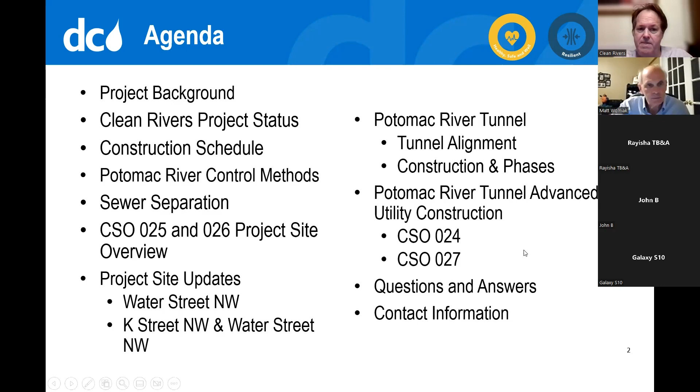All right, so a little bit about the background. The project is to control the combined sewer overflows into the Potomac River, the Anacostia River, and also into Rock Creek, which is in Rock Creek Park, and to relieve flooding in the Northeast Boundary area. A few years ago, DC Water, EPA, Department of Justice, and the District of Columbia came together and hammered out an agreement, a consent decree, that we would improve the waters of those rivers we just discussed.

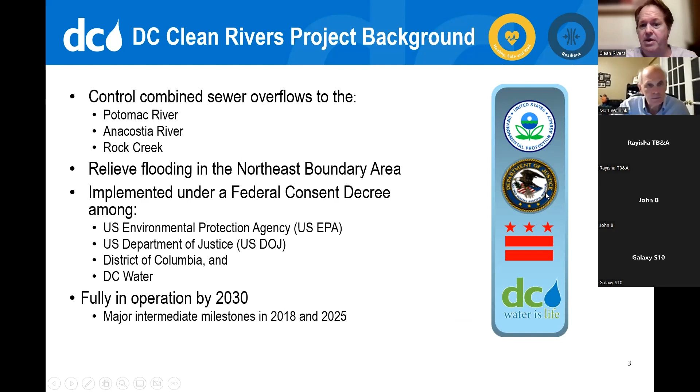We know that these improvements are going to be in operation and in place, all of them, by 2030. Some of them are already in operation, and we'll see the good work that they're doing. There's a map of the District of Columbia, and where the projects are happening. I want to move you down to the purple line there, which is the Blue Plains and Anacostia River tunnels. Those tunnels are already in commission and working.

The next one I want to move you up to is the orange one, which is the Northeast Boundary Tunnel, which will catch the flooding in that northeast area through Bloomingdale, Rhode Island Avenue, and other areas of the city that are low points that get very flooded when it rains and where water and other things overflow. And then right off the Northeast Boundary Tunnel is a small tunnel called the First Street Tunnel. The Northeast Boundary Tunnel is to be completed in 2023, and the First Street Tunnel is going to be connected in the next year also.

So that will flow into the Northeast Boundary Tunnel, which will flow down to the Anacostia River tunnels and down to Blue Plains, where that water that's captured will be treated and then released. Now, tonight, we're going to be focusing on the area of the yellow tunnel, the future Potomac River Tunnel. The work on the Potomac River Tunnel, as you'll see in the schedule, is scheduled to start in late 2023 and complete in 2030. Also, at the top of the tunnel, you can see the orange dot, and that's our CSO 025 and 026 sewer separation.

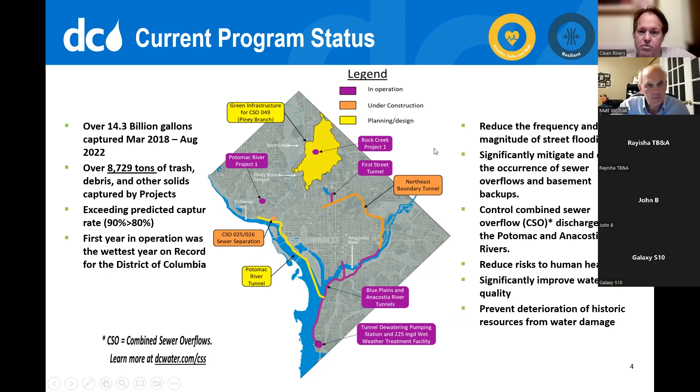So let's take a look at this chart here. This is a timeline bar chart of the work that's going on and the schedule of the work. The first project you can see on the top is Combined Sewer Overflow Project 25-26.

The locations of construction for that project were South Street, 31st Street, Wisconsin Avenue and K Street, and Water Street.

The top bars on the bar chart are for the project's coordination with the community. We are constantly sending out notices and alerts of work going on in the area. Like tonight, we're having an outreach event, and we'll have another one either at the end of the year, holidays permitting, or in the first month of the next year to give you new updates on the project.

Let's take a look just at the CSO 25-26 bar chart. South Street and 31st Street are complete with their construction. Wisconsin Avenue and K Street will be complete at the end of November, probably more toward the end of November than the beginning of December. Water Street is about to begin, it's already started with the setup of the MOT, which you'll see later, and will end in February. All the areas will be completely finished with new street pavement in April.

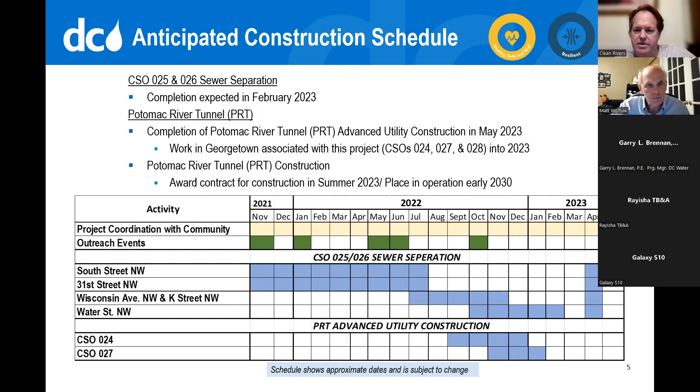Let's take a look at the overall map of the location of both projects right now. The blue circles, as you can see, say 25, 26. That orange area is the area that contributes to the major flooding in that area, which 25 and 26 capture or release out into the Potomac. Those are the areas for the sewer separation, CSO 25-26 sewer separation project.

The black areas, as you can see, are the locations of 24, 27, and also 28, which I haven't spoken about yet. These are part of the Potomac River Tunnel advanced utility construction work being done now, 24 and 27. 28, as far as PRT-A is concerned, has been completed.

There's also, as you can see up the road, an area considered Georgetown University. That is not really in a public area per se where residents will be impacted. It's on university grounds, and we're working with the university to complete that construction. That'll probably start at a later date, but it's an area we won't really discuss because you will not be impacted as residents of Georgetown by that area.

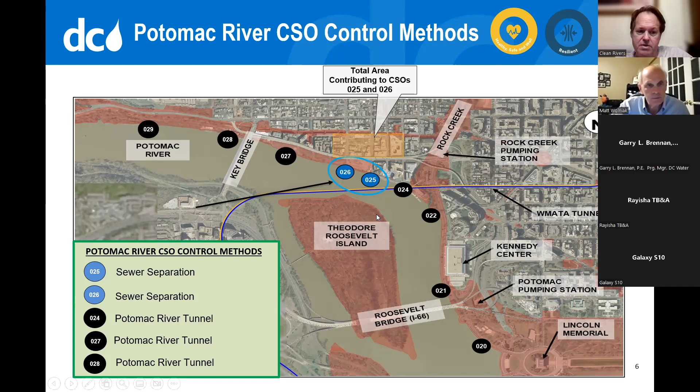So let's move into CSO 25-26 and just touch on a little bit about combined sewer overflow and the separation. I think this is a pretty good graphic, simple enough for folks to understand what happens. You can see in the top photo both water and waste coming from homes, and water and waste from streets and buildings running into the same sewer.

Because of the age of the city of Washington, D.C., we have an old, smaller sewer system that today is not able to catch the amount of runoff that it did 100 years ago.

So something needs to be done. This project is one of the things that should relieve all of this combined sewer overflow. In the graphic below, you see what they're doing there. We will separate that runoff into a storm sewer and a new sanitary sewer that will run down to Blue Plains, both run down to Blue Plains and be treated. So no longer will you have that mixing that when there's a major storm, it rises up, pushes over its protective barrier, the waste and water into the river. That'll all be captured.

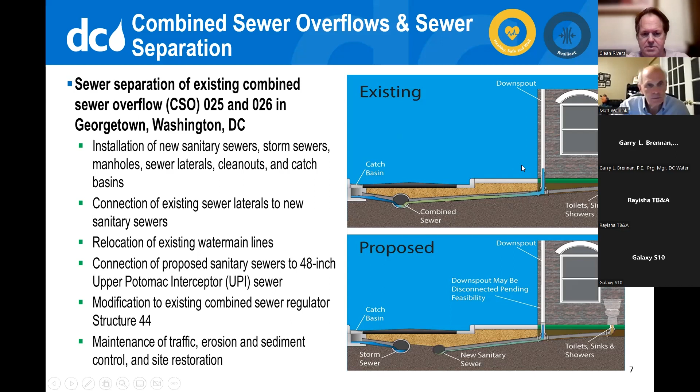This is the overview again, part of that orange area that we saw on one of the last maps. The catch area, the drainage area, and in the purple you can see where the CSOs, the construction work is being done right now for the CSOs 25, 26, 31st Street, Wisconsin Avenue, and up a little ways, Water Street.

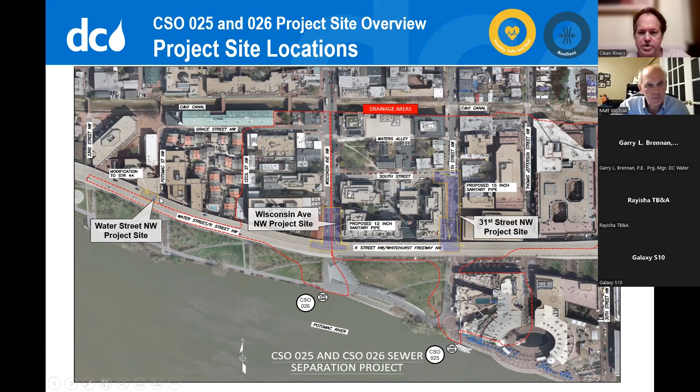All right, we're going to get into some of the construction areas now. The first one we're going to touch on is Water Street and the approximate construction period. Remember, all of these schedules are approximate, sometimes with the weather and other things that may happen on the construction site. We may find things in the ground that were not expected to be there. These dates could move a little bit, but right now the approximate construction period for Water Street is mid-October to February 2023.

So I think we have Mike Johnson, who's going to talk a little bit, just tell you what we're doing over there at Water Street.

Thanks, Andy. So down on Water Street, we've been working with the DC Water team. This is a rehab to an existing structure. We're going to make it a little bit larger. We're going to be excavating probably 12 to 13 feet deep on the north side of Water Street, right there at Potomac Street and Water Street intersection.

So we do have some travel lanes that are impacted. We're going to be working to temporarily shift those lanes to get the traffic around and also detour pedestrians around the sidewalk. But we'll have a permanent construction set up with concrete barricades, some fencing, lots of signs. There should be no reason why anyone comes into the work area. We're going to have that thing secured pretty well, so that people can get around us, go about their day-to-day activities, and we'll do our best to get in and out as quickly as possible.

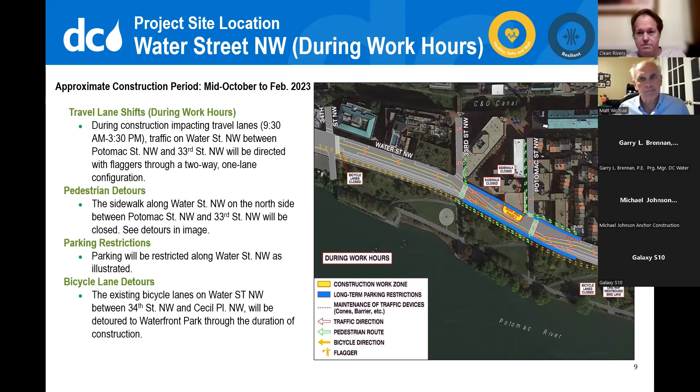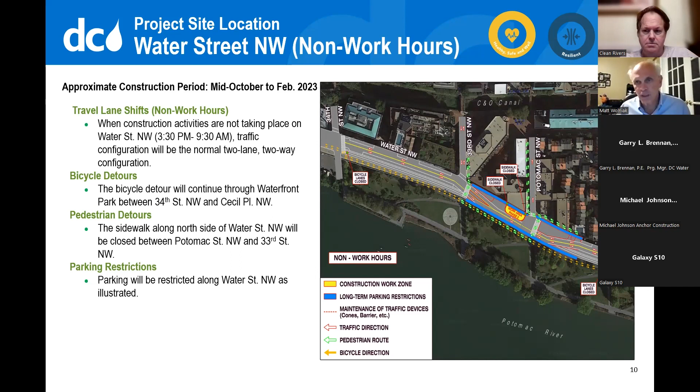What's a little different at this site than most others is that, as I mentioned earlier, outside the hours of 9:30 a.m. to 3:30 p.m., traffic will have one lane open in each direction. So during off-peak hours when we're not closing things and flaggers aren't present, we'll maintain one lane each direction on weekends so people can get through. There won't be any work stoppage through this area. All the other restrictions remain in place: parking restrictions along Water Street between Cecil and 33rd, closure of the north sidewalk between 33rd and Potomac, and the bike detour along that section of roadway down to 34th Street.

Okay, Andy, next slide please.

Let's have Michael explain phase 8. Michael has already explained some of the work going on up at Water Street, but there's also work going on down at the corner of Wisconsin Avenue and K Street. Both of these, for a brief period, will have work happening simultaneously. Approximate construction completion for phase 8 is in December. Michael, do you want to explain what's going on there?

So if you've been in the area, which most of you have, you know we recently were on the east side of Wisconsin, and as of a few weeks ago we've switched over to the west side. This correlates with the slide we saw earlier about separating the combined sewer and storm systems, getting sewer into the sewer and storm into the storm, to limit impact to the river. We're working on the west side of Water and Wisconsin Street to add an additional access point onto the large sewer main, which is 48 inches in diameter. There's some travel lane and pedestrian restrictions, but everything is set up well and people have been actively moving around our work site, both cars and pedestrians.

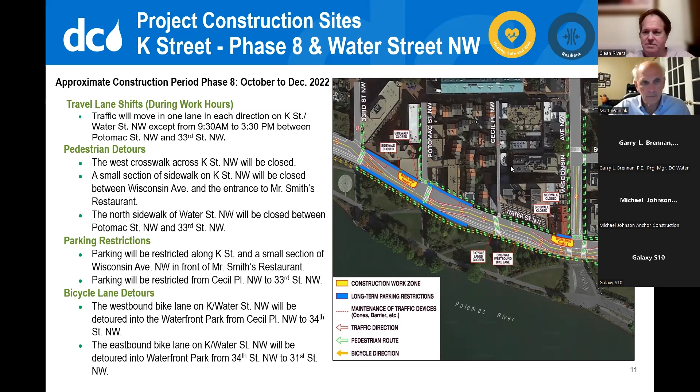Okay, so that's the work sites at CSO 25/26 presently and how they will proceed. I want to look a little bit at the Potomac River Tunnel, because the next project sites that we'll look at are in support of the future Potomac River Tunnel.

The map here in front of you shows the area in blue, which is the future Potomac River Tunnel. If you look all the way to your right, you can see it cut into the white area there, that's where it will cut into the Anacostia River Tunnel and then flow down to Blue Plains, where all the wastewater from the combined sewer overflows and the new tunnel will be treated. The areas of concern in the tunnel that impact Georgetown residents, as we already mentioned, are CSO 24, CSO 27, and CSO 28, which you can see along the map.

How is this different from the work we're doing now? This work in the future? Let's take a look at what we're building.

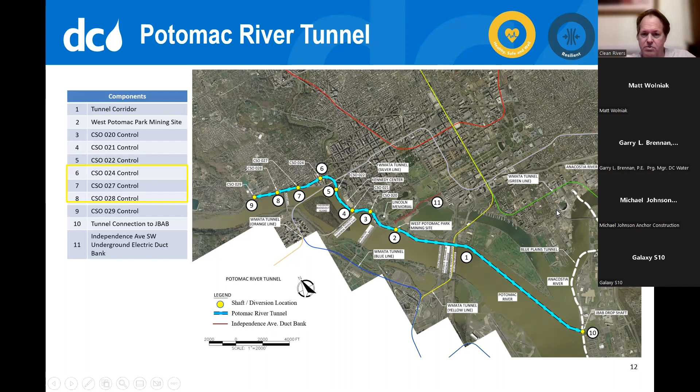This is what is being built in areas of the city: the Northeast Boundary Tunnel and the Anacostia Tunnel, which is already complete. You can see the homes and the rainwater coming down, and the new structures that will be produced to catch that rainwater and transport it down to Blue Plains. An estimated 654 million gallons currently enter the Potomac River, and we're expected to catch 96% of that by volume. Those old pipes that ran wastewater out into the river will now be turned to run into the approach channels, the drop shaft, the adit, which will come down from the street and across into the large tunnel and run down to the Blue Plains wastewater treatment plant.

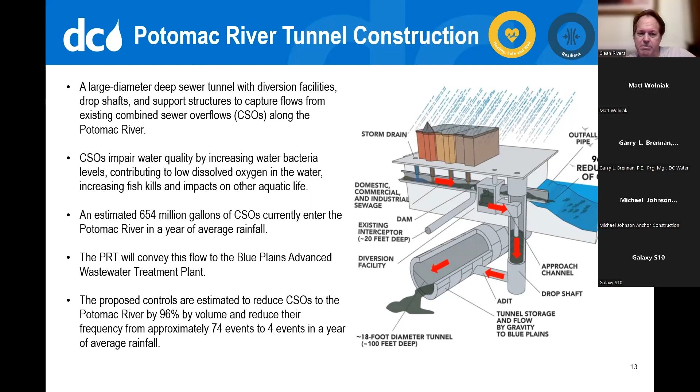So that's what we'll be building when tunnel work starts at the end of 2023 through 2030. Those large structures, many of which are almost completed in the Northeast Boundary Tunnel area, will be completed in 2023.

Let's look at the schedule for PRT-A and PRT-B. We expect to complete PRT-A in May of 2023. A little bit about PRT-A: that's advanced utility construction. In order to do the work and have those facilities we just looked at run and work properly, electric power needs to be brought to those areas. So currently, PRT-A is bringing electric power to the areas where the PRT-B construction sites and the diversion shaft, etc., will eventually be.

As you can see in the bar chart below, the PRT-B tunnel system will begin construction at the end of 2023 and beginning of 2024, and be put into full service in 2030.

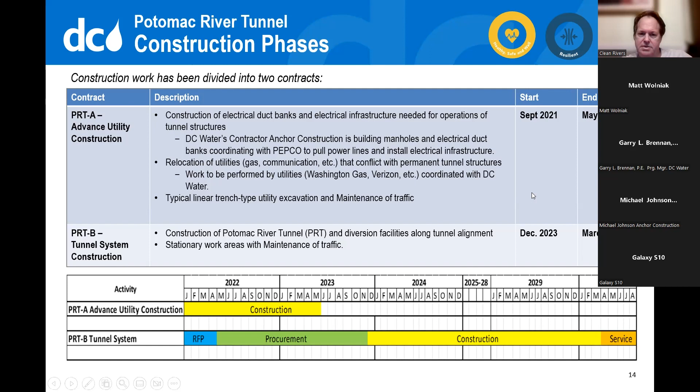Now we'll move to some of the sites. This is CSO 024, as this is eventually what the work needs to be done and where the power needs to be brought.

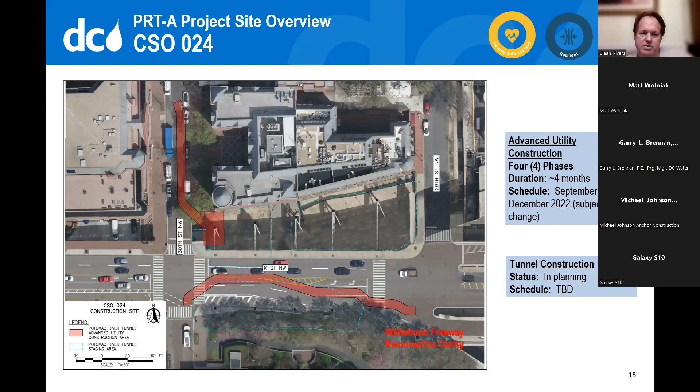We expect it to go from, it had already begun in late September, and we expect it to be complete in December. As you can see at the bottom of that map, this is a view of K Street with Whitehurst Freeway removed. So work is being done below Whitehurst Freeway and along 30th Street.

So we're currently on CSO 24, and the construction period, as we said, is September to December. On this phase, there will be 4 phases at CSO 24. We'll go over the first 2 phases today, and then we will have another meeting in the future, by which time we'll be on the last 2 phases of CSO 24.

I'm not too sure if John Beasley can help with what is being done over at CSO 24. You still on, John? Yeah, I'm here. Currently, they're finishing up on 30th Street, which is highlighted there in red with the duct bank, and they should be done there shortly.

But then they'll be moving right into K Street at the intersection of K and 30th, and then working a little bit to the east, putting in that other duct bank that was shown on the previous slide. We will probably be there through, as that other slide said, about the end of the year, putting in the duct banks.

So, John, what is duct bank work actually like? Just briefly, if you can. That just entails the conduit tubes that are installed in the ground through which the power conductors run. So there won't be any overhead power lines like we're used to seeing when we were kids. Power lines are now all buried. So this is just the tubes that are put in the ground to carry the power conductors.

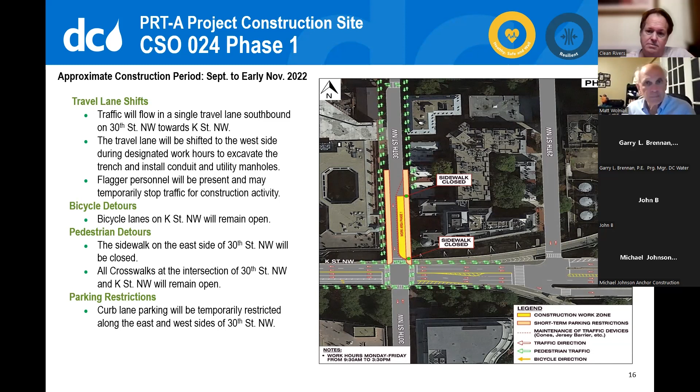Thank you, Matt. Next, Phase 2 slide, as you can see, is a little bit of a different area after 30th Street is complete. And once again, it's the beginning, if you remember the map we saw earlier, of the length that will go down K Street. Matt, do you want to review that?

There's not much new work going on in construction, so we don't need John, but it's very similar work. Matt, do you want to go over the maintenance of traffic briefly? Thanks.

The work will mainly be over towards the southeast quadrant of the roadway during this time. The important thing here is that through this intersection, K Street will be reduced in both directions. As you go westbound from 29th to 30th, it will go down to 1 lane, stay 1 lane through the intersection, and then open back up to 2 lanes. Same in the opposite direction from Thomas Jefferson to 30th Street, it'll be reduced from 2 to 1, follow 1 lane through the intersection, and then open back up to 2 lanes by 29th Street.

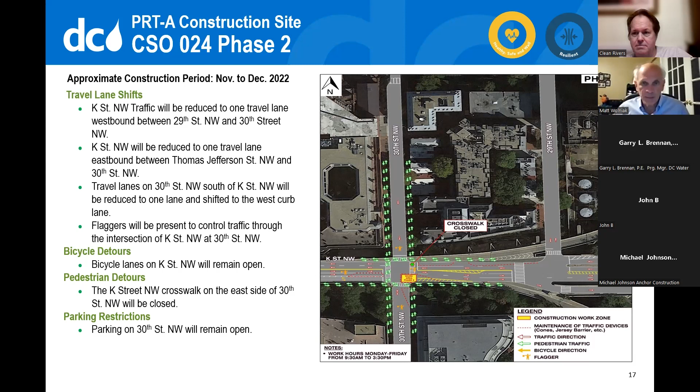There's no changes, no work on 30th Street, so it'll stay in the same pattern as it is, and flaggers will be present to control traffic through the intersection as needed. The bicycle lanes will remain open, as I said, from the west to 30th Street, so they'll remain open through this point. There will be a crosswalk on the east side of 30th Street that will be closed, but please use the west, north, and south side crosswalks. Parking on 30th Street will reopen, so you can park along the street, both sides, during that time.

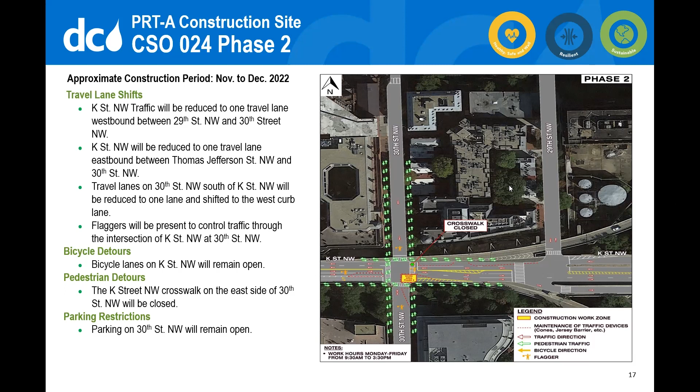Okay, CSO 27. We heard that there is work already being done for CSO 25, 26. In this case of Potomac River Tunnel Advanced Utility Construction, 27, which is also the same area of Water Street. That work is scheduled between November and February. That work has not begun yet. When it does begin, we will inform you of how the MOT will be set up and how it will look, because there is also some work that will be occurring with 25, 26, so there'll be work done together at that area.

Gary, is there anything you want to add to that with regards to the combination of work? Nope, I think you covered it. All right, thank you. We'll try to condense it and make it as efficient as possible, since both contracts are in the same area. Yeah, thank you.

Okay, that's basically the presentation for this evening. We will now open it up to questions. Monica has raised her hand. Monica, if you want to unmute yourself and ask your question, we'll get one of the team to answer. Thank you.

First of all, I want to acknowledge all of the cyclists who are working service jobs or busy with childcare in the evening and can't attend. The late start to this meeting was also not an ideal use of anyone's time. I'm just really disappointed with the work that's been done so far, and I anticipate future disappointment, because we're forcing pedestrians to share space with cyclists where they didn't before, and there's still car space that could have been removed. You could remove more car space so that pedestrians and cyclists don't need to share space.

There's entirely not enough signage for the cyclists and for the pedestrians. The pedestrians need to be warned that they're going to be sharing space with cyclists. I want to note that Matt Wolniak introduced himself as being from a traffic, pedestrian, and bicyclist standpoint, which is the wrong order. Pedestrians are first, bicycles, and then car traffic. Bicycles are also traffic. So if you're going to say traffic and you're talking about cars, you need to specify.